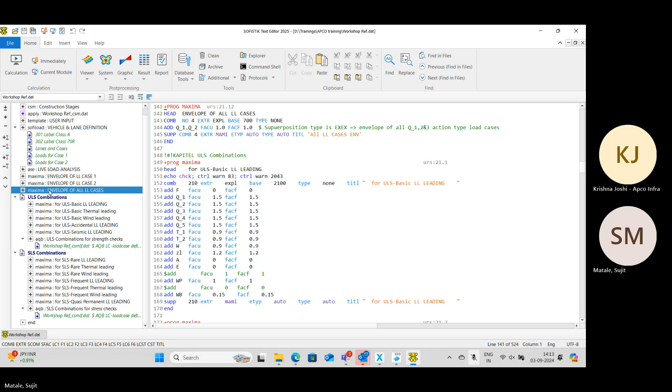Fine. So live loads you need to create one TD, and from the reference file that you already have, just pick up the live load template and these modules. So SOFILOAD, ASE. So you'll find it over here in template, the third module, up to this maxima, 6, 7, 8. So you should select up to the end, that is line 146.

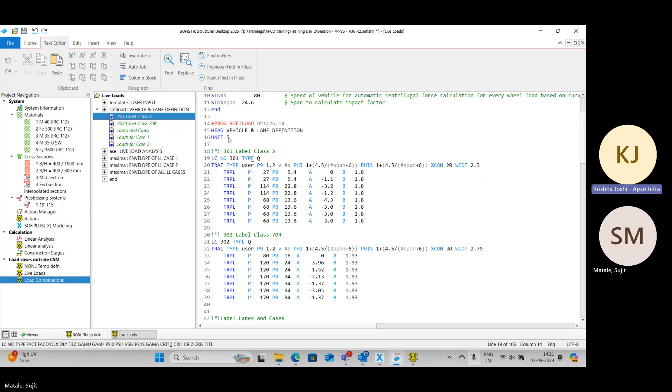So if you look over here, here is a task wherein you say SOFILOAD. SOFILOAD is a task wherein you define your loads. For example, temperature loads also we define in SOFILOAD. The same module we are going to use. So here LC number 301 and type is Q. If I go to help, LC number 301, definition of load case, and type is Q, type of action of load case. Q is for variable loads by default.

Then comes TRAI, the train definition. So that definition is now going on. Type is user defined. If you just scroll down, there will be a list of different types, so as per codes also you can define, right, in the table that pops up.

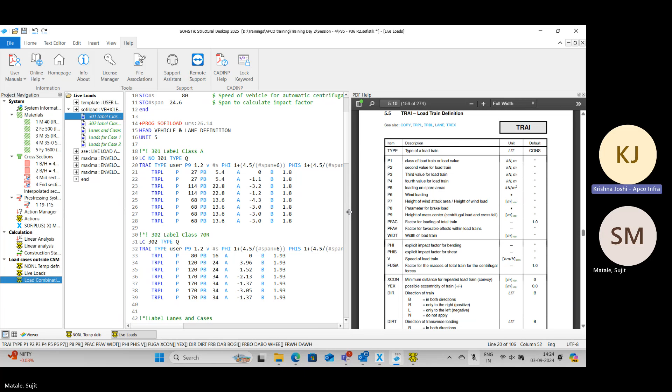PHIS is explicit impact factor for shear. XCON is minimum distance for repeated load trains. Okay. So it should repeat after every 20 meters. And WIDT is width of load train, 2.3 meters for class A.

Now comes TRPL. TRPL is point load of load train. Every point load is separated by a distance. So two wheels. So P is 27, vertically downwards. The value for braking load in horizontal direction is 5.4 here, 1.8. So here B is distance of wheel across the length, and A is distance to the last load of the train, the previous axle.

If you go to the next axle, 27 kilonewtons, 5.4 kilonewtons, and minus 1.1. If you go to IRC 6, you will find 3.2 meters, 1.2 meters, 4.3 meters, and so on. The entire definition. Now, this is something that I never defined. So this is simply the class A definition for me. Every time I give it.

For example, you have got a special vehicle load now. Then there will be additional rows, similar input, let's say LC303, type is Q, TRAI. This all remains almost the same, except the width changes. And you will have to put in additional concentrated point loads using this command TRPL. This is LC302, this is 70R. So these are the point loads for each of the axles and the distance by which they are separated. So this is the definition of your class A and 70R.

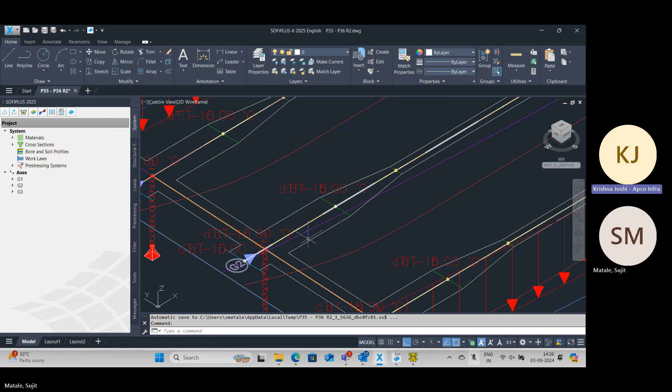I have my AutoCAD line over here. See this, which is my alignment basically. So I can go to this axis, right click, create axis from 3D AutoCAD curves, and I give it a name MV. I say okay, and I click on this curved line. I give that name MV, and I'm just exporting it now. Now MV is there in the database. It is not there in the database before the export.

And now I go to SSD. I focus on my live loads alone. So I go to live loads here. And here the axis name it asks for is MV, which I give. When I use this axis, I use that axis over here directly. So for lane number, MV will be referred to. So our direction will be about MV now.

If you look at what a lane is, we are going to define the width of traffic lanes basically. So this is our primary axis, it's not yet a lane. And this is our lane, which is axis dot one, or we can call it MV.1, which is YLA and YRA. So how it has been defined: YLA stands for left value at start and YRA stands for right value at start.

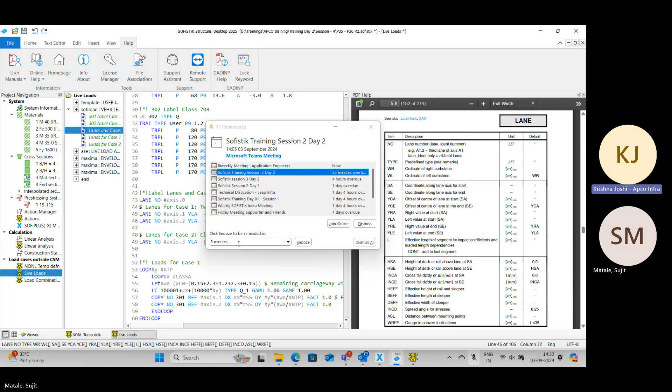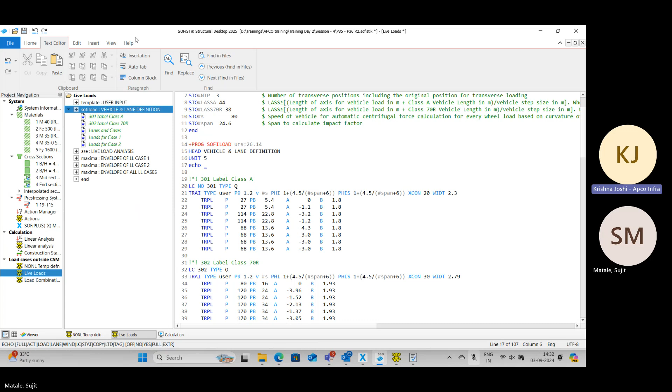Here we say execute load, and let's see where our axes are getting modeled. As a result, have a look at these numbers. Okay. This is what my lanes are getting generated. I know what it is. If I go to help, print out option. Okay. And I say ECHO LANE.

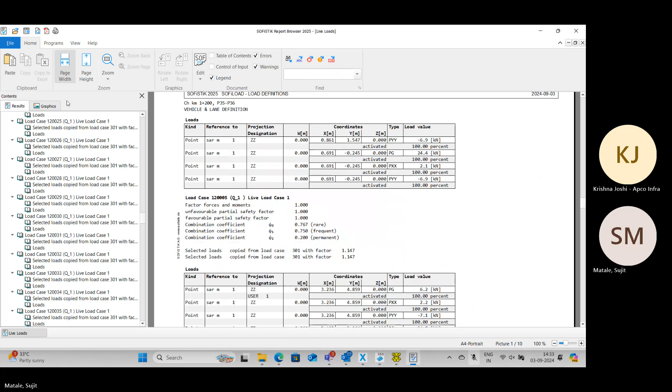Currently, if I look at here, there is no output in my graphics anywhere. So I just requested output for lane definition and I gave it a run again. So that is not sufficient then. It's my 1, 2, and 3. Saying that is on to the left, right?

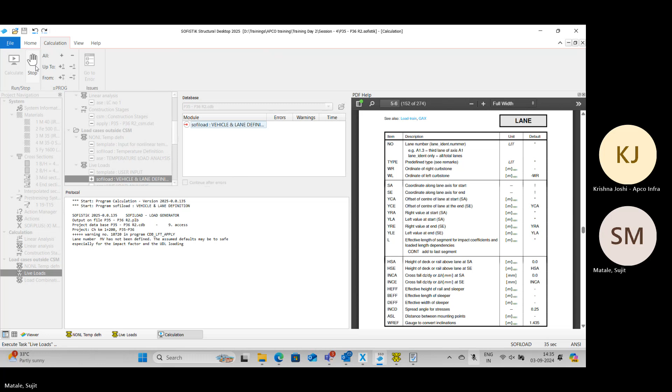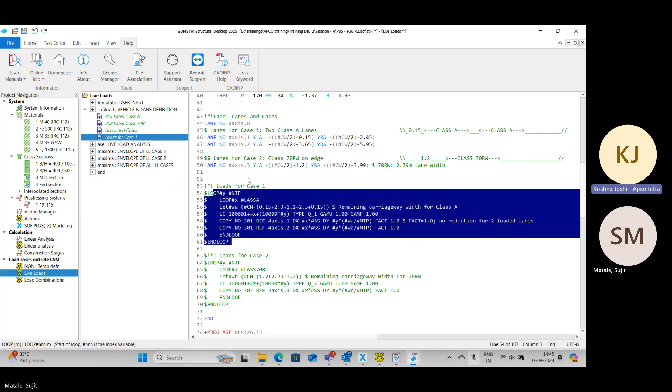Or what I'll do is, for the sake of simplicity, let us run this 70R only, so that will have only one vehicle. So I'll just comment this out. And so I now go to home and I go to WinGraph. I go to the top view. I go to loads, input loads. I go to all loads, LC. 2,00,001 is my first load case.

Okay. 2,00,002 is this, 2,00,003 is this, 2,00,004 is this. So it is shifting ahead by 1 meter in each of the loads.

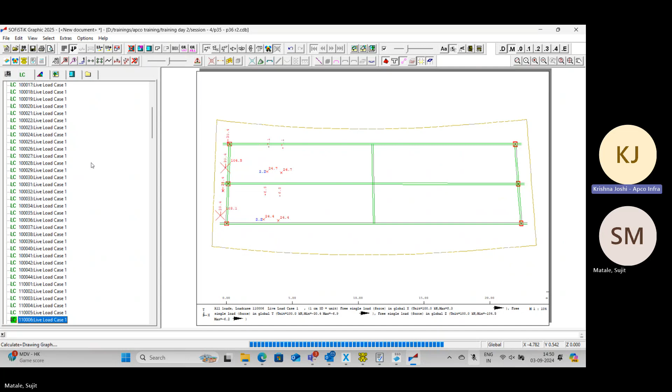So I got classes placed like this in 2 lanes in series, and I have 40 load cases over here, 41, 42, 44 load cases for class A. Then comes my transverse shift by 300 mm, say, and this is again A. Okay, both vehicles shifted, right? Not just one. Both shift.

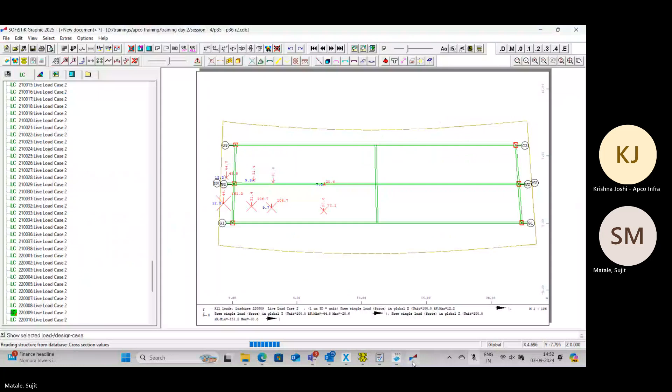So we have got only now load cases. How many numbers? 1, 2, 44, and 2 lakh 1 to 38. So maybe 100 in numbers, less than that, right? 80 or something, 80 to 90. 44 यार. So now what I do is नहीं जब 3 था तब भी केस 44 थे.

What now I need to further do is I need to analyze these loads. I have generated them, I have defined my loads, but I haven't analyzed them yet. So I need to analyze them. So I have got an ASE here, which is my advanced solution engine, and I simply give it a run. I say execute ASE.

As I do it, I can go back here in my visualization and see here 1 lakh 1. So this entire thing I can see over here. Load numbers from 1 lakh 1 to 2 lakh something. I can also have a look at the results of this here in bending moments. For example, forces, My, LC, and I can have a look at the results here like this. And let me just increase the sections at which I am looking at the results. Simply runs like this, changing like this. Clear?

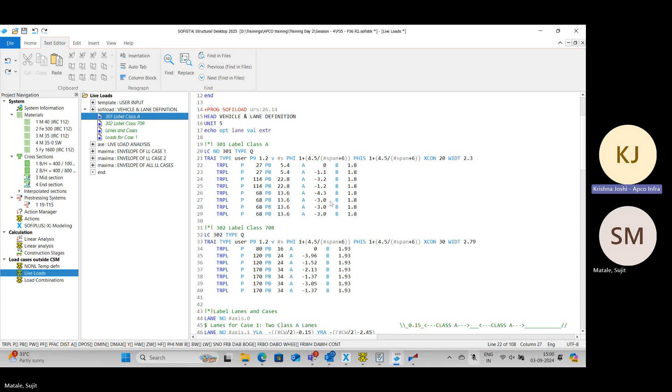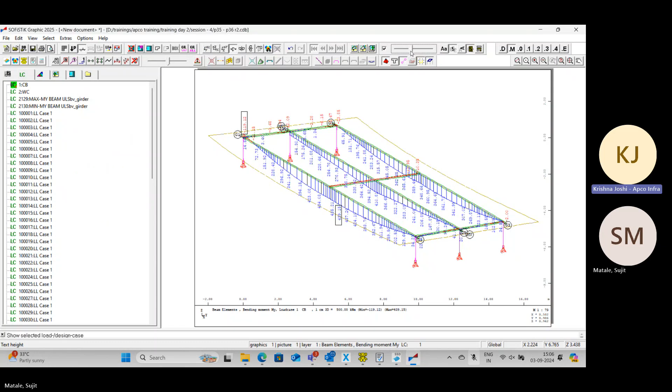It is crash barrier and wearing coat. Only 2 load cases we focus on. So we go here in WinGraph, and crash barrier load is this. This is the value 439. I want to combine them. Also, I want to perform an envelope. I want to take an envelope of them. So what I do is

I have created here a MAXIMA module. At the bottom, after those lines, I give them the combination rule. I give it a combination rule number 1. So I say here let COMB be 1. COMB stands for combination rule. Now further it asks me what kind of superposition it is, EXTR value.

So if you have something as a rule in this CADINP language, let's say COMB, here COMB value is 1, since I have defined it in a variable above. Here EXTR stands for kind of superposition, and input is EXPL, different rule like design fundamental combination, accidental combination. I, as a user, want to give all load factors. This is the idea. Now, base 2100.

Base is base load case number. That means the generated combinations will be shown with an offset of 2100. For example, of maximum MY and minimum MY, the load case numbers generated will be 2129 and 2130. Where this 29 and 30 comes from is a predefined value. It is mentioned in this particular table below. I can show you, but you don't necessarily need to see it every time.

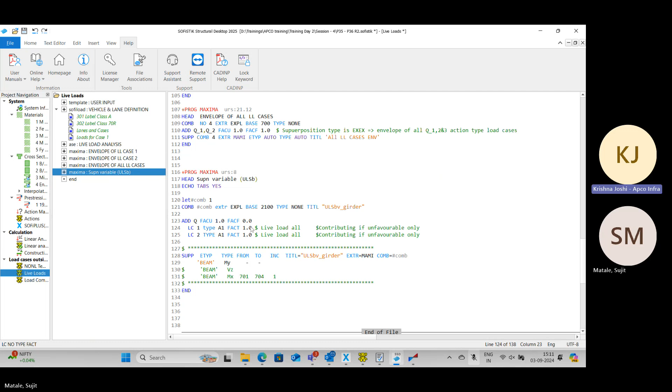So what I do is LC 2, I say type is A1. So 1 is crash barrier and 2 is wearing coat. And I further say SUPP, that is the definition of the superposition. ETYP, the element type, is beam, and the output that you are demanding is MY. Now I just give it a run and see what the output is.

As a result, you see that in my database I have got load case number 2129. If I look at CB, it has got bending moment 439 in this girder, and WC has got 285. So 2129 is taking an envelope of the two load cases above. Now I go back, and instead of this A1, I make this A2. And now I give a run.

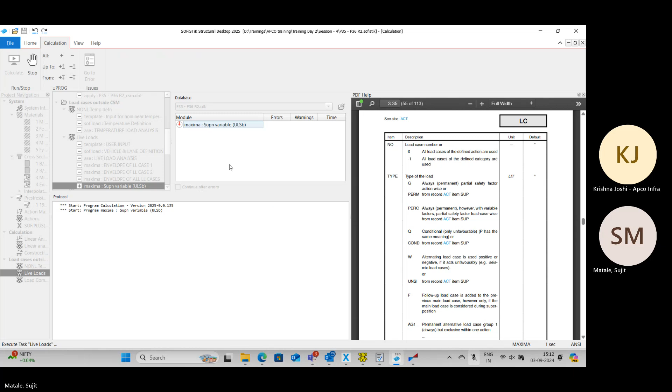I go back and see that 2129 is 721, which is an arithmetic sum of WC and CB. So if you define them as the same type, it takes an envelope. And if different, it is an arithmetic sum.

So this type A1 and A2, you don't need to remember. So Maxima alone can take an envelope. Now, how it works? This was a very simple problem statement. For example, you have got now so many live load cases. You can simply define them like LC

case 100001 to, whatever, I'll just say 200044, with an increment of 1. Type I give it as A1, factor as 1.0. It should give me an envelope of this. But now I take an envelope of my live load cases, but I want to have summed them up with my crash barrier, load case 1 and load case 2.

In that case, what I do is type is A1 for 100001 to 200044. And I give it type A3 then. So now what this does is it takes an envelope of these live load cases and an arithmetic sum of load case 2 and load case 1.

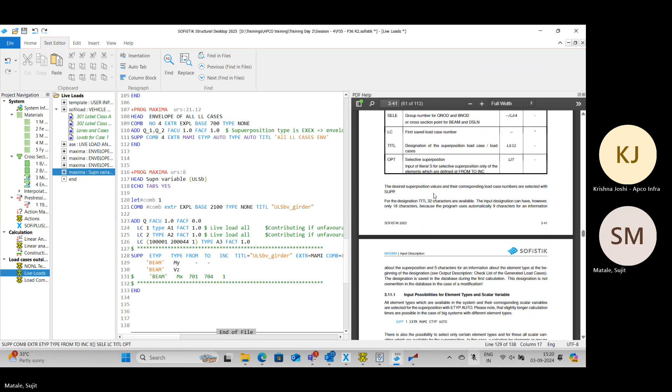And it is mentioned over here below. If I just scroll down, yeah, it should be here. So this is for nodes. It's for spring elements. No, here it is mentioned for beam elements. My bending moment My max and min will be generated in 29.

This will remain whatever you have specified, 2100. So My max will be 2129. My min will be 2130. Similarly for Vz, Vy, so these are predefined auto set numbers for that. So now I just give this a run wherein Vz I'm expecting to get generated with an offset of 2100.

So you see that it is 2125 and 2126 for Vz in the shear force diagram here. Now let's look at what that automatically provided code says and proceed with it. So this was just for the sake of explanation.

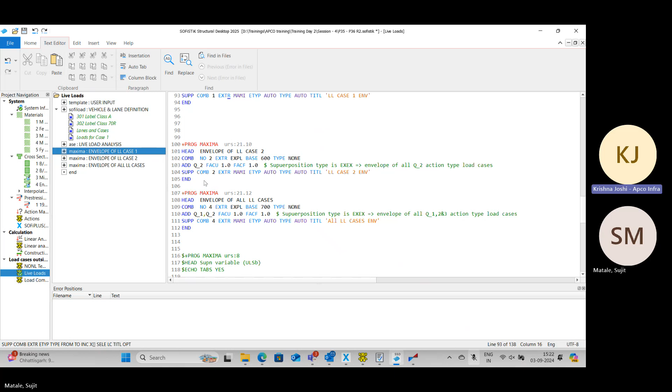So there are two ways of the definition. If you write add Q and FACU, FACF, LC1, LC2, and you give types, then it will get into those load case numbers. But if you don't give this input at all, then it will take all load cases. So in this case, it's not using any load case types. It is directly using only the action. Now, why should you take superposition of the envelope only is the question.

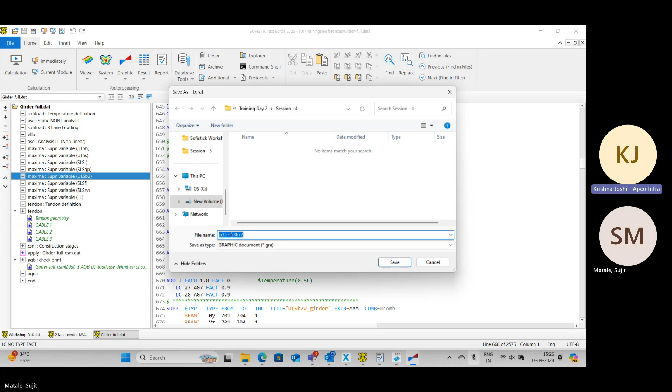It is always A and AG with numbers starting from 1 to 99; you can use A1 to A99, similarly AG1 up to AG99. So I'll say that instead of going with this, the automated sheet that I showed you, which

find maxima using this particular approach, so this is the simpler one, and I use it usually; this is the one that I use, okay.

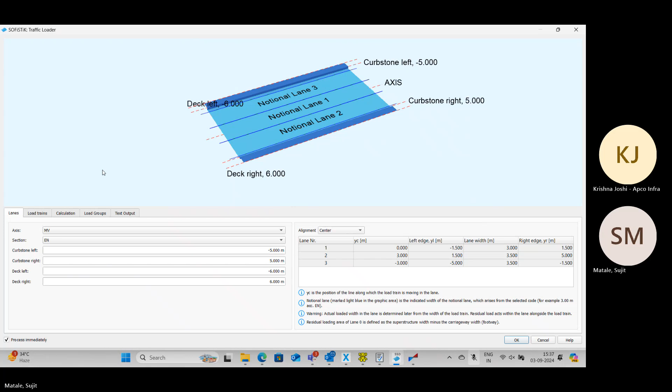Okay, so let's get our hands on that influence line. Insert a task more. Push. Task name is traffic loader. Here, where it has not inserted. That's not it. It first asks me to select an axis, and I select the axis MV. It further asks me to select the code.

I select IRC. It asks me the carriageway width through this option, curbstone left and curbstone right. So I say minus 4.1. Left is minus 4.5, and this is plus 4.5. Keep my alignment as center. I go to load trains and I say add load train.

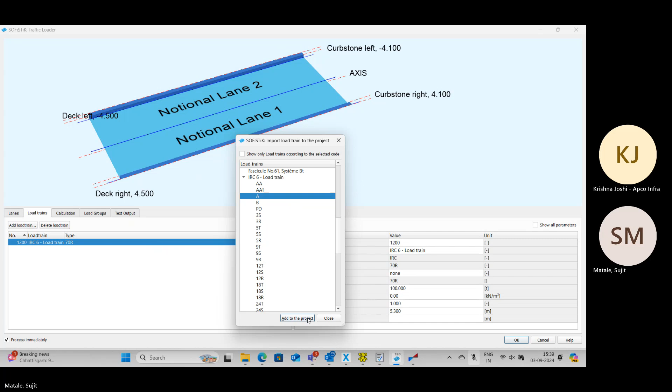6 outputs to look for. First, load distribution. I'll say multi-girder system rigid load distribution here. The options are single girder system, multi-girder system, hinged load distribution, shell system.

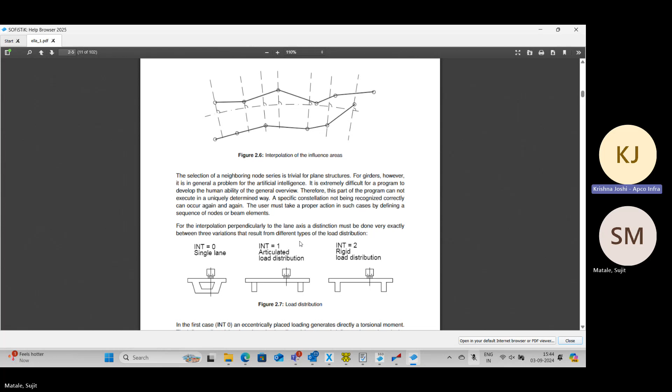In the first case, INT0, an eccentrically placed loading generates directly a torsional moment, and the shear force for the effect of the eccentricity has no jump in the loading location. In the second case, INT1, the load is replaced by two forces that act at the two girders. The torsional moments result only as a result of the rotation.

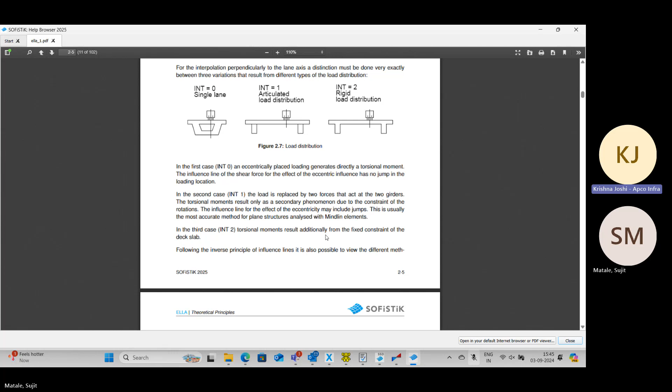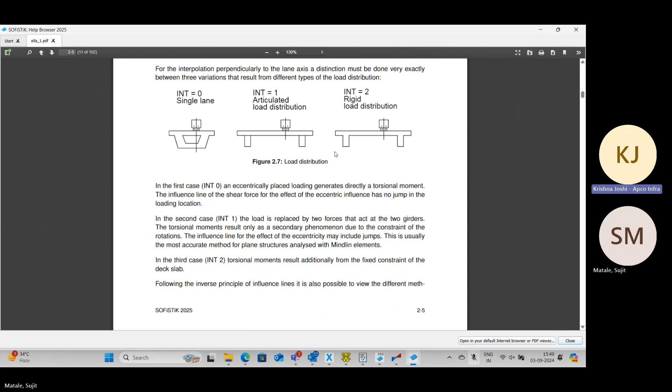I'm just now giving a thought to whether I should... transverse influence lines, and the third said that we should go for those options. Up to it that which I never thought about, whether I should go options, that means shell ones. But I have seen people also using, in some...

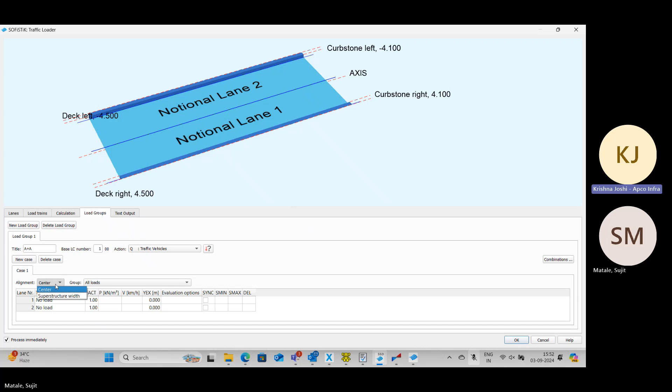Yes. I go to case. Same hi hai, I keep alignment center. Position of vehicles. And I go with class A. I can further create 70R here. And new load case wherein nothing in the other lane. So on and so forth, I can keep creating new load groups.

I can say okay. Let's see. Gives me a warning. It says analysis of chord defined load areas. INT 0, 1, 2 is applicable only. Says local behavior requires values of INT 3 or higher for wider lanes, shell. 16 meter. So you increase the INT value to, it was given 3, 5, 7, 9. More the integrations, the INT values along the transverse direction, more is the accuracy of the result. This is what I mean basically.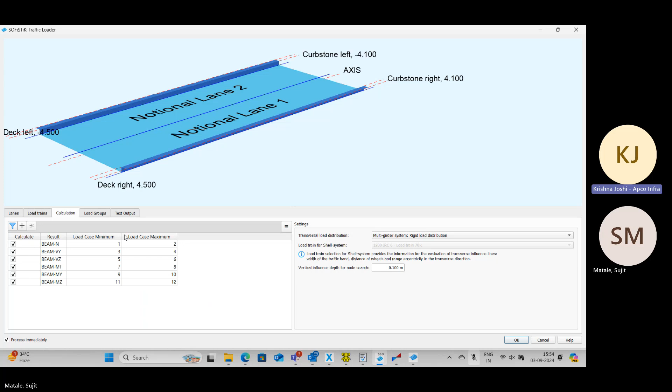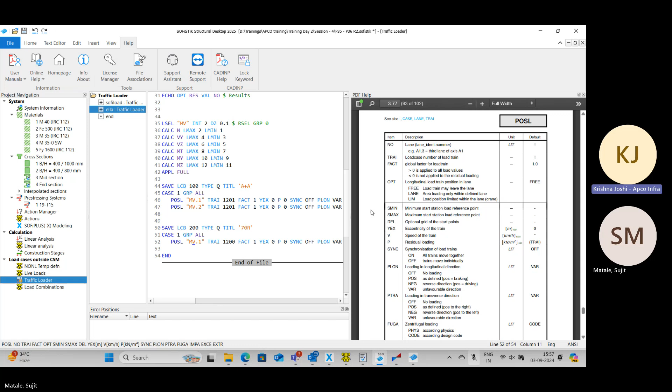Okay. Take 5 minutes break. Yeah.

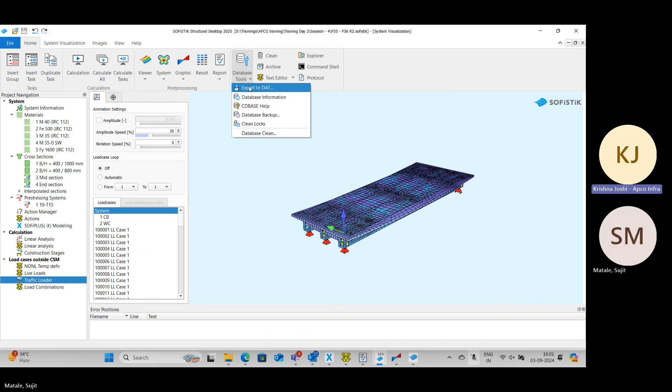So I click on this and it asks you what all tasks you would want to export. So I say that I want to export my materials, my cross sections, my finite elements of SOFiMSHA or of SOFiMSHC. So I go with SOFiMSHC. I want to export my action, also maximum. So okay. As a result, a TEDDY file gets generated, and you see that this is NORM IS.

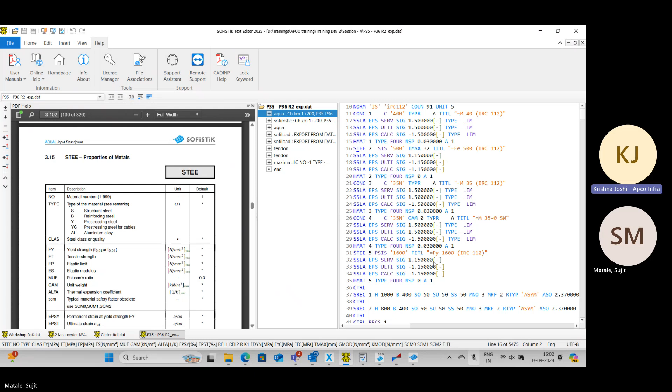So NORM stands for design code. So it is IS IRC 112 that we designed. CONC is the first material, concrete, that we defined. Then STEE, the steel material properties. So all those properties you could simply copy here and paste for your next projects. So this is our rectangular standard cross section that we defined, and this is a line for that input.

The cross section that we defined, the mid section, has been defined using the coordinates in the Y and Z plane. So these are vertices. If you remember, that started from 100 and went up to 111 for the rectangle, and so on and so forth. So basically, you have got the entire geometry generated over here, and you can take this input and start developing your TEDDY files. Maybe if time permits, we will develop right from scratch, slowly, material by material.

So to perform stress checks, the module to be used is AQB. So I write +PROG AQB. Automatically comes HEAD and END. The format for AQB is such that, let's say load case is 1, and here you can give a command STRE for stresses. So whatever load case you mention with this command STRE, STRE stands for linear stresses and plastic forces.

if I go to the design results, design option is not available. The design tree is not available over here. The reason is there are no stress checks. There is no design output here yet. Okay. So if I go to SSD and right here, load case 1 STRE, E stands for elastic stresses.

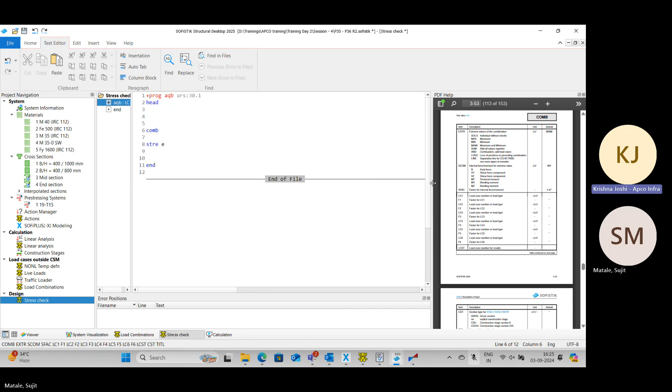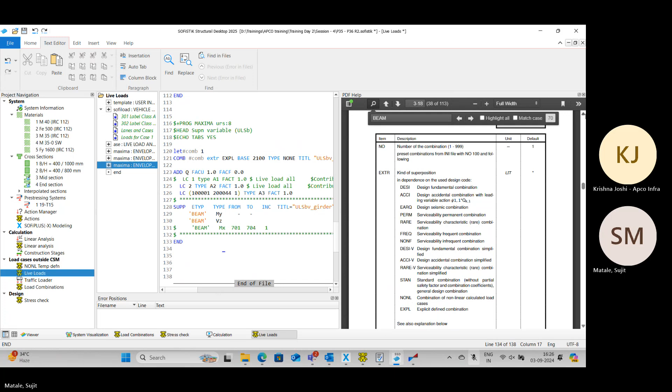I give it G underscore 2 and give factor F2 as 1.1. Okay, I have a maxima that I have defined over here in live loads. Okay, at the end, wherein I have taken sum of, or an envelope of all the live load cases. Okay, I'll go with those which I got from my...

So what I do now is I have got load case over here. Okay, which is an output of my traffic loader, and it is from 101 to 112 and 201 to 212. I need to take an envelope of these cases. So what I do

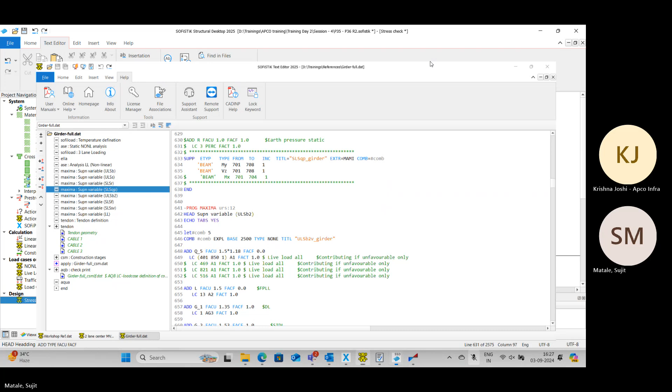for this stress check, I just add a maximum over here. I say plus, text from here, okay, straight away. The one that, and I just paste it over here, Control V. I remove everything that I don't want. Okay, I don't want all these load cases. What I only am, 101 to 112, right?

I apply no factor to it for now over here. Okay. Base I keep currently 2500. Let it be 2500 for now. I don't in fact want VZ as well. So I just comment it out. I just remove it from here like this. Okay. And I give it a run here.

So this is basically I'm taking an envelope of load cases 101 to 212, which were my live load cases generated from my traffic loader. And I simply say execute maximum. And as a result, in my database, I am expecting that 2529 and 2530 should be my two load cases generated. As I scroll down, I get 2529, which is critical of either 110 or 210.

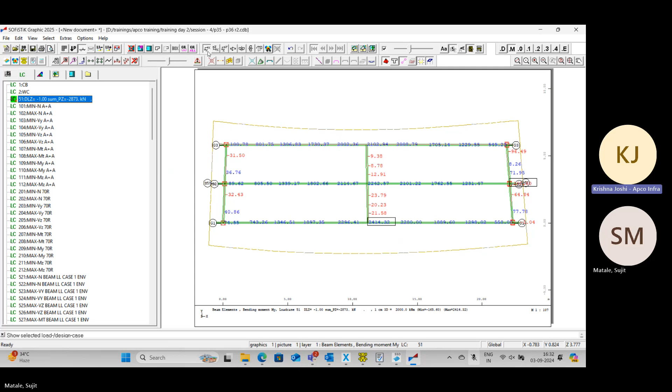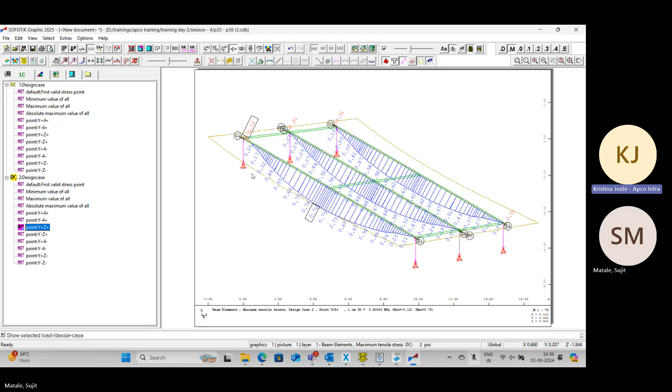Now you want to perform a stress check for your SLS combination. Okay. SLS combination will have GPC coming from your construction stages as well as, for us, it is only the live load case now. We have already created pre-superposition for this load case and the max of this. What we now do is, I'll just comment out this LC1 comma.

I will call in G1, G2, G3, P and C from my construction stages. I could also call them as load case number 5010, 5090, 5095. But if I start calling like this, load case wise, for example, I have got a balanced cantilever bridge. Several activations of your segments, and maybe your 100 and 200 load cases might be there, which is G_1 in our case.

So I just go here and I just copy that input SLS combination from here. Select this combination and instead of writing this line, I'll just copy it from there. Same syntax. So it is combination, we are sum. Load case 1 is all load cases coming under G_1, factor is 1. 2 is all load cases coming under G_2, our SIDLs, factor is 1. Stresses. 5 is L_1.

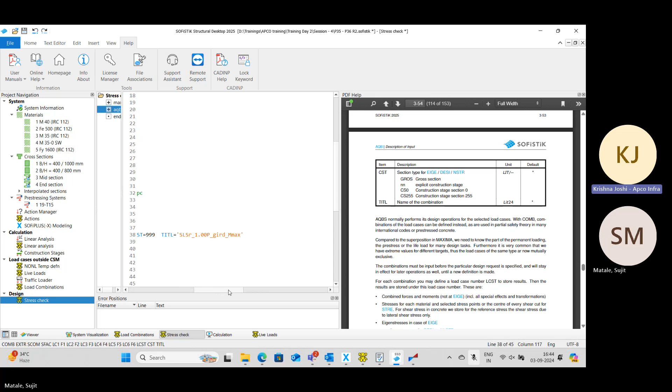Star default value, that means it will tell you to give that input.

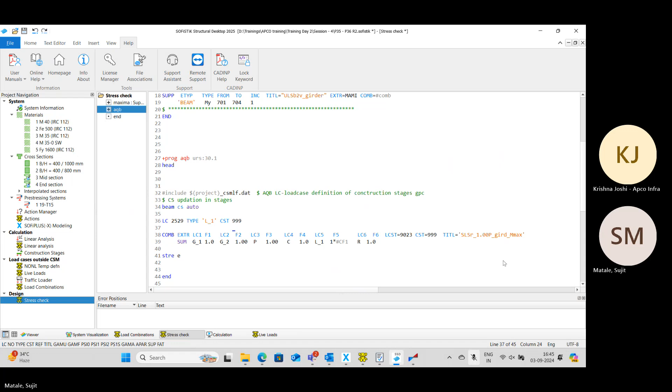So this information G_1, G_2, okay, this information is coming from a file which I am including over here, which is hash include name of the project underscore csmlf.dat. If you go to text editor, then, okay, so my construction stages are not executed currently. So let me execute my construction stages first.

Model file. Right click and I say calculate construction stages. Then I'll have that C, and let us have a look, G_1 underscore 3 contents. I also need to then run traffic loader because I am using it in that particular module.

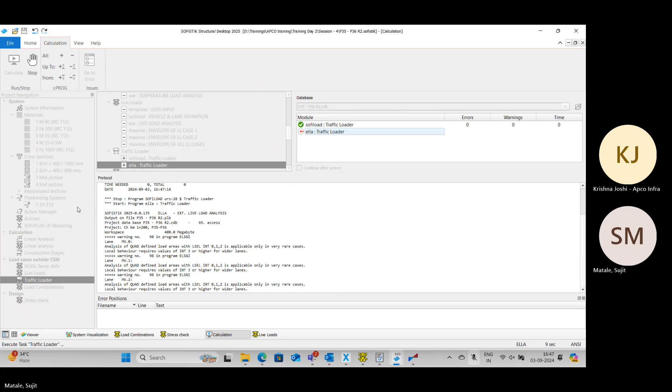Maxima, which is envelope of my live load cases. Then I go for this stress check using AQB. Okay. Define this variable anywhere. Type R cannot be used in combination. So there is, I also have this type R. It's not there anywhere.

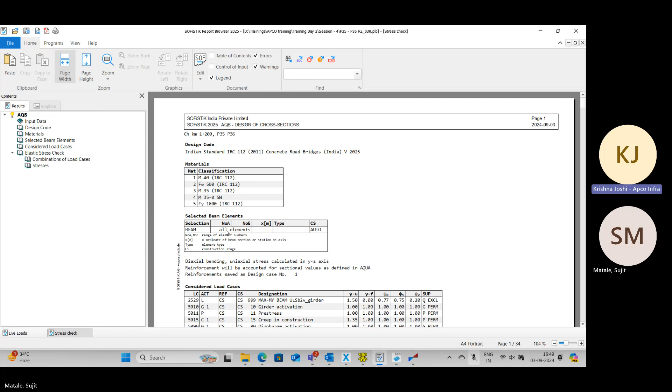See that it says all beam elements have been selected for that stress check. Considered load cases are 2529, something that is coming from your maxima. It's 5010, 5011. It is considering all of them. And these are the stress values. Now, what you should understand over here is that in stress checks, from where is this?

What that file is: if you go to home, go to text editor, open text file, then you go to this CSMLF file, right? And you see that here 5010 has got type G_1, and so on, as you mentioned in your construction stages. When you mention G_1, that is file 100. So once you mention G_1, it accounts all these load cases. In construction stages, it would have listed out those activation stages over here and taken them for our SLS combination directly without mentioning each stage number every single time.

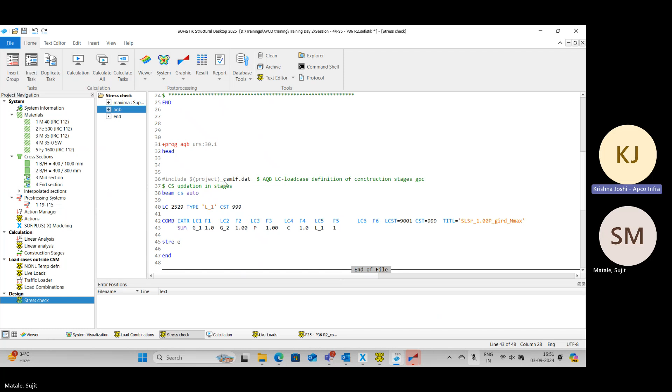And G_3 is mentioned over here. So the title for this file was CSM checks. We included this file, include hash project underscore csmlf.dat. So those load cases were brought in and taken here as G_1, G_2. Yeah.

One thing that I have not shown you is, for example, if I'm taking a maxima over here, I'm taking envelope of my live load cases, envelope of temperature load cases, and doing the sum of these two. Now, let's say I got some result and I want to understand what factors are being applied and which load cases are associated with that particular maximum. So in that case, what you can do is

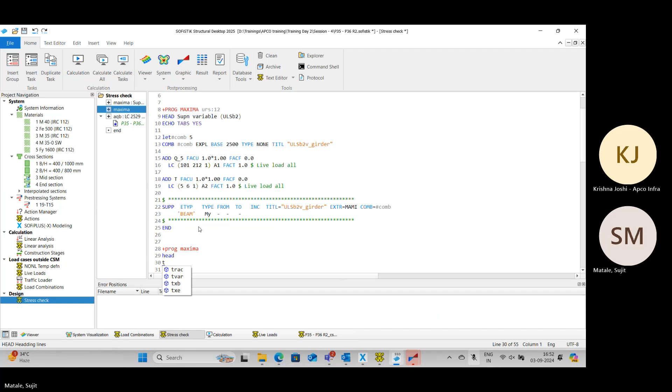trac LC 2529 etyp beam, and X is 0 in that case here and element 2. So let's say I just go here and select any random element over here. One, let's say. Give it a run.

Considering my load case number 2 and load case number 5, with these factors, as a result, I am getting that 2955 maxima. Fine. Maxima means absolute maxima. So it can give you both maximum positive and maximum negative, as you ask for. Yeah, absolutely.

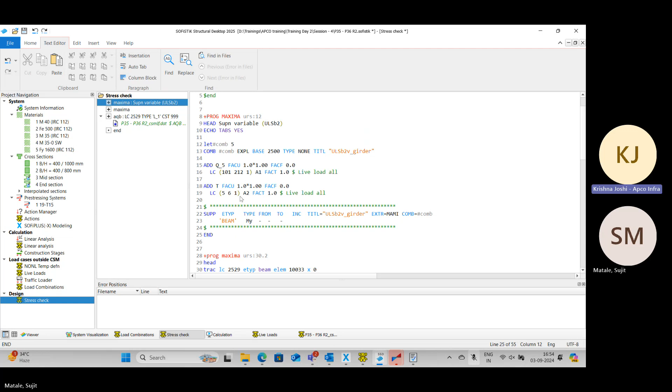So what I can now do is I can just show you the automation. So now you understood the concepts, right? How maxima works, how AQB works, and all. So what I have done is, okay, it is all a ready-made file, just the way we had ready file loads. Okay, let me take this one. Hello.

So here what I have is I have got maxima for ULS basic combination live load data. I have mentioned over here combination rule number 210. EXTR is EXPL and base is 2100. Type is none and title is ULS basic live load DD. For all the actions, irrespective of whether it is defined in my load cases or it is not defined.

Such add works as per IRC 6. If the action is not there, then it will be simply ignored. Suppose, for example, W stands for wind load. Wind load is not modeled. It will be ignored. And I get an output for all 12 outputs over here, which will be for my ULS basic combination.

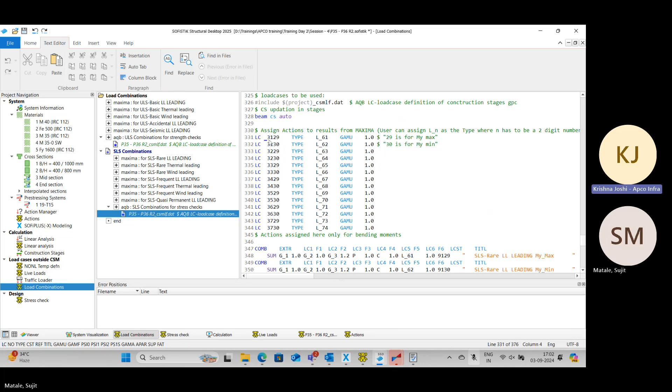So the explanation was fixed. This AQB is exactly the same that we prepared. So here you see that hash include project name underscore CSM file is brought in. Beam CS auto, that means automatic from the construction stages. So I'm taking beams with automatic cross section operations. LC is coming from these maximas which are there above, SLS rare, SLS thermal, wind and all.

I am storing it in these containers L underscore 61 to L underscore 74. I'm then going for combination wherein I'm calling G underscore 1, 2, 3, P, C, L underscore 61. I'm taking from here and saying that this is my SLS and it is my SLS rare combination with live load leading for MY max. And I'm storing it in load case number 9129.

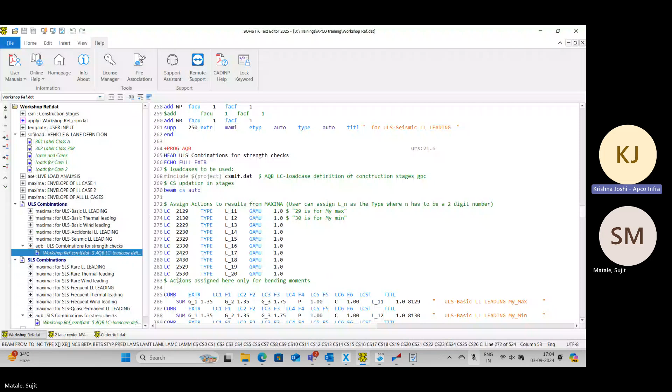Or a better way can be, I can go back here to database tools and say export to .dat, and get this file out. Back to SSD. I say tendons. Put a task over here for tendon definition, text editor, and here is tendon. Set this and I say plus prog tendon, and this is my head and end.

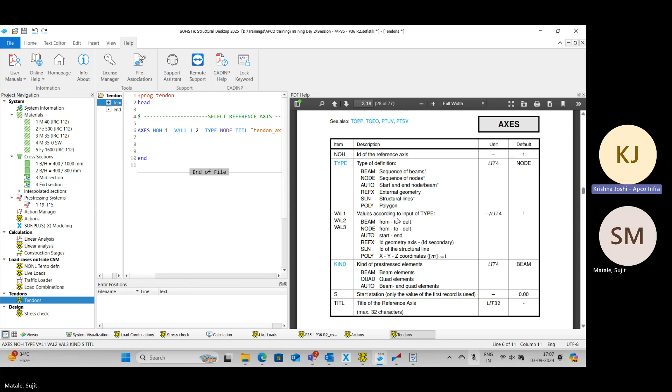Further, I need to define an axis. I want to create an axis based on the start and the last point. Say AXES, so it is reference axis. NOH is ID of the reference axis. VAL, value according to its type, and the type is node. Maybe I could just write this type over here to be there in the sequence. Type is node, and value is node number 1 to 2. And title is tendon axis 1.

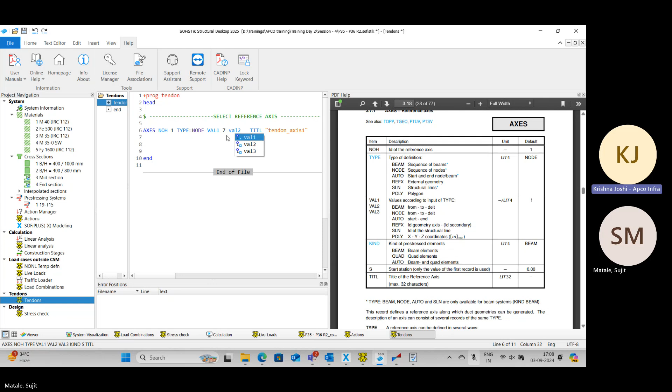Let's say that I want to create a tendon from this point to this point over this axis. So I go to point and I give it some number, let's say 7. So this point is number 7, and further one is number 8. You saw that it was number 8, right? I export it. Now I say that my first point is 7 and VAL 2. So it is from node 7 to node 8.

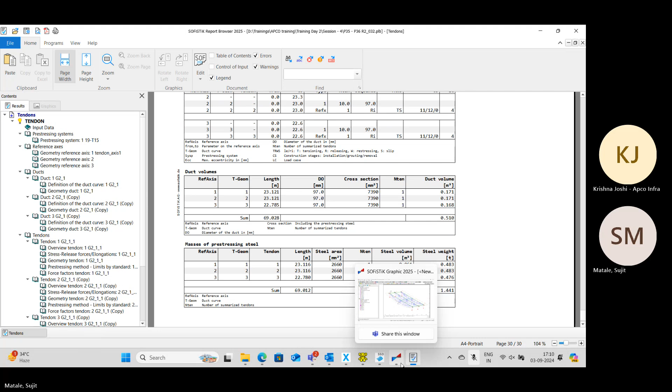That's why I did that. What I do is, this is my tendon axis, right? And tendon axis 1 is the name that I have assigned, right? So this is my tendon axis, you see this? And here also my tendon axis is generated now, and that starts from station 0 and goes up to station 23.2. So this was axis generation without going into SOFiPLUS.

Even if you have got many number of girders, let's say 20, 24 in your model file, then you have only those points modeled already, and you need to simply run a loop start to end for each of the girders. Now what I next do is, here in this case I have defined this axis 1 to 24 using node numbers like this. So what I do is I need to define,

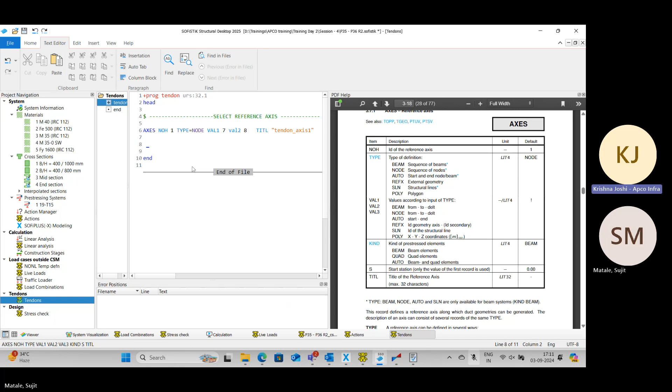okay. So for definition of pre-stressing system, I have got a command which says SYSP, which is pre-stressing systems. Then it says NOPS. NOPS is ID of the pre-stressing system. Input for NOPS, I'm taking it from here. The first NOPS is 1001, and applying a loop 19 times. So basically I'll be generating 19 pre-stressing systems from 1001 to 1019, with number of strands getting increased in each of the pre-stressing systems 1, 2, 3, 4, like that.

So further, what I have is AP is 140 into #n plus 1. N has got values starting from 0 to 18. So in the first loop, n will be 0. So here 140 into 1 will be the AP value, the area of the tendon, and then in the next loop 140 into 2, 140 into 3, 4, like that up to 19. So when it comes to your PSF value, that will be area into 1862 into 0.9 into 0.87.

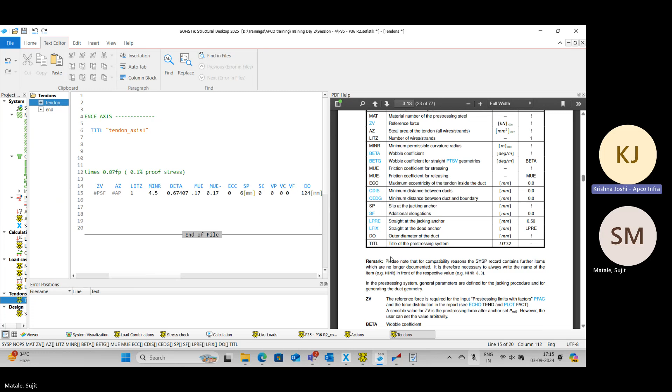ECC is minimum eccentricity of tendon inside the duct. I am keeping it 0. SP is slip at the jacking anchor, that is 6 mm. SC is slip at the other end. I don't know what SC VP is. See this value 0, and maybe this is my old inputs. I have not written anything out here. Outer dia and inner dia and the title is here.

Okay. So see what is the output of this loop. It says that there is a warning, and it says that item COMP at SYSP is obsolete input. So, previously there was such an input, but what I can do is I can select it as a column block like this and just delete these two inputs. So these are no more in this latest version, and let's see what is the output.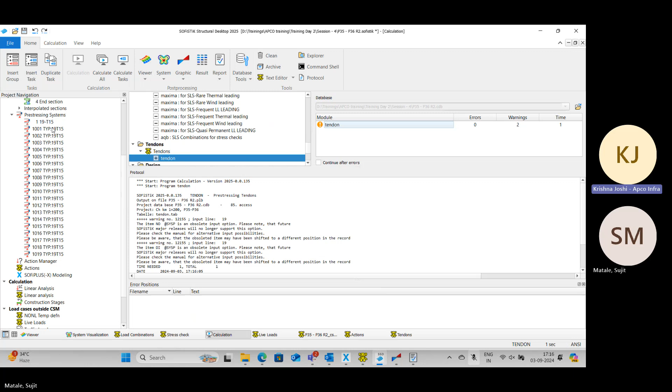And also it says that DI is also an obsolete input. Please note that for future SOFiSTiK. Okay, but I remain with it. And here also you can see onto the left hand side, it has generated pre-stressing systems 1001 to 1019. If I go, it shows me pre-stressing system 1001, wherein the reference force is 204. The reference stress is 1457.95, which is as per our code, and area of each is 140.

Next is the pre-stressing system with 280 square. Next is 140 into 3, something like that, for 19 times the new pre-stressing system. So pre-stressing system is defined. Next what we need to do is define the geometry of our cable. Okay. So I go with this define cable.

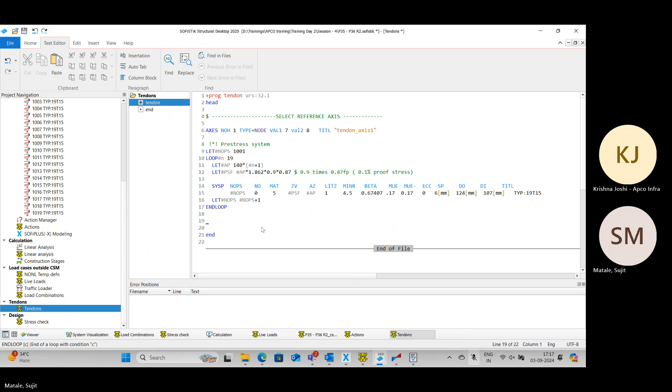So this is something called a block. So I'm defining a block for cable. So the name is cable. It has got inputs, which we were doing the same inputs using our pre-stressing editor using graphical user interface. So inside this, I have defined everything using the variables. Now I say station at start, and I give it a variable name TENS. U value is XD1, V value is TD.

So the variables. Now what I can do is I can further say cable definition for girder 1 or first cable definition or something we can just mention. What I do is I just pick up my numbers from here.

So I defined several cables in a single go, which will not be appropriate. So here I'm just giving a loop and running all 20 cable profiles in one single loop. So only 3 cable profiles, but running different loops.

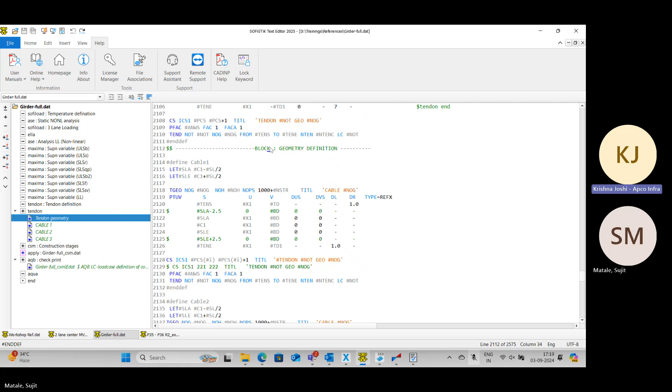C1, or I say that for this I just simply let hash length of my girder. Okay. And so TNS is the starting point. Let hash the last one, last station point. So 22.7960. Let me just confirm how it is taking over here.

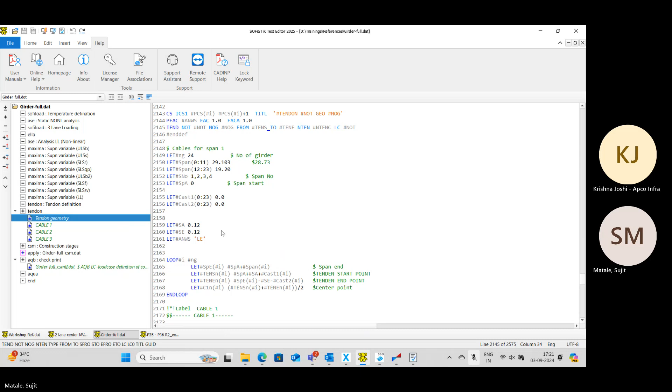Start. So, tendon start. Tendon end. Okay, so that's it. Yeah. So tendon start and tendon end. And for

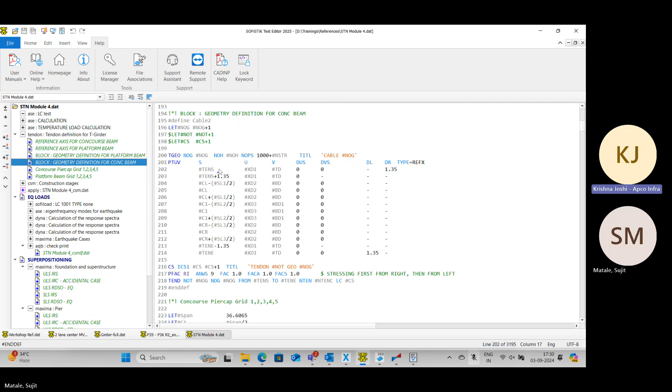So if you write include cable 2, it will paste below it line number 196 to line number 218. This contains some variables, TENS, for example. So here I am writing that entire block, and that TENS which is defined here will be fed to it. Yeah, so you don't need to.

The cable geometry parameter is actually fixed in the cable. Yeah, exactly. Absolutely. And for every next cable, you just change those values which you change.

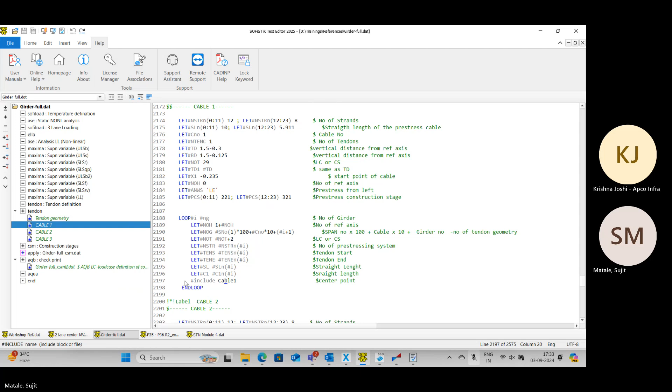So this also is information related to construction stages, in which construction stage you need to activate it. Here it says ICS1, construction stage of grouting. So every single information that we used to fill in the graphical user interface is here. It also has PFAC, which stands for pre-stressing limits with the factors. If you remember, we selected as per European standard in SOFiPLUS, that option.

And finally, we had an option for the ID of the tendon, number of the duct joint tendon. If you want to leave any recess, you can leave any recess. For example, here I am saying from TENS, that is 0.12 meters, up to span minus 0.12 meters, the recess. And NTEN, where NTEN is the number of summarized tendons, and LC0, the load case for that.

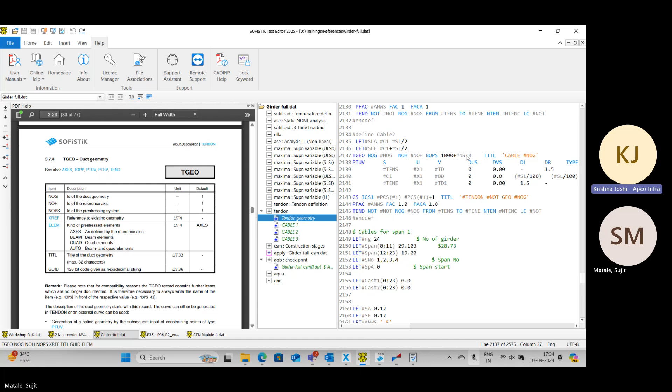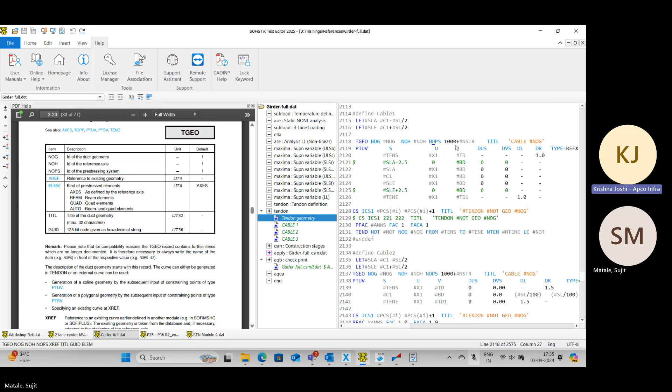So if you put NSTR value 12 over here, and then you say hash include cable 1, what it does is it includes this entire block over there, hash include cable 1, this block. At that time, your NSTR value is 12. That means your NOPS is your number of pre-stressing system, ID of the pre-stressing system. It would take 1000 plus 12, that is 1012 numbered pre-stressing system. And if you go to your report, 1012 is something with area of each tendon. It is 140 into 12. 12 strands, but it takes pre-stressing system with number 1012, and appropriately it has all its definitions as per.

एक बार मतलब करने के बाद ही you will get a feel, and that too you don't need to start with any file or something. What you need to do is define it using SOFiPLUS, export it, and start looking at it. Yeah, let me show you this.